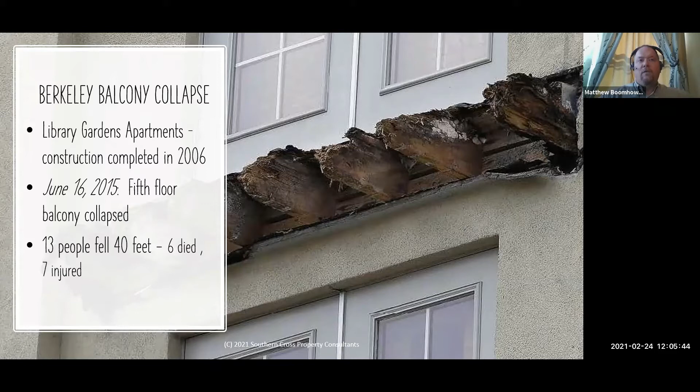And that includes a bunch of changes that were designed to fix some of the problems that were identified with this construction. But the state also said, look, we have a ton of existing housing stock out there that may have these problems, and we need to come up with a way to fix that. And so the state passed a series of laws. SB 326 and SB 721 both do different things.

And I'm going to put these up side by side because I know some of the people here deal with homeowners associations and condominium properties, and other people deal with multifamily rental, so apartments. And these laws do different things for those two housing types. So SB 326 was passed in 2019. And even though we popularly refer to these by the Senate bills, these specifically got codified into state law.

So SB 326 modified Civil Code Section 5551 and the subsequent sections of the Civil Code. When SB 721 was passed a year earlier in 2018, it added a section to the Civil Code, 17973. So if you really want to see specifically what the law says, those are the spots you can go and look. So what needs to be inspected under these laws? Well, it's actually very similar with both of them.

So first off, everybody refers to these as the balcony bills, but that's a real misnomer because while balconies are certainly part of this and they were the triggering event, it actually applies to what the code now refers to as exterior elevated elements, or EEEs. And the way that the law defines EEEs is by saying these are anything that is a wood structure in whole or in part.

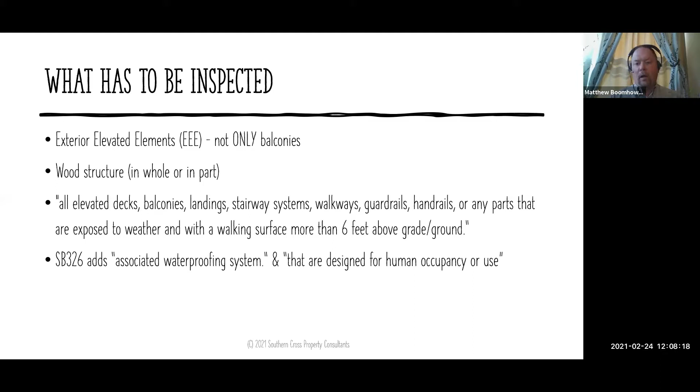So if a building has a steel structure or it's a concrete building like a high rise, those aren't wood elements. You don't have to inspect those. This is really aimed at buildings where some portion of these exterior elevated elements are made out of wood.

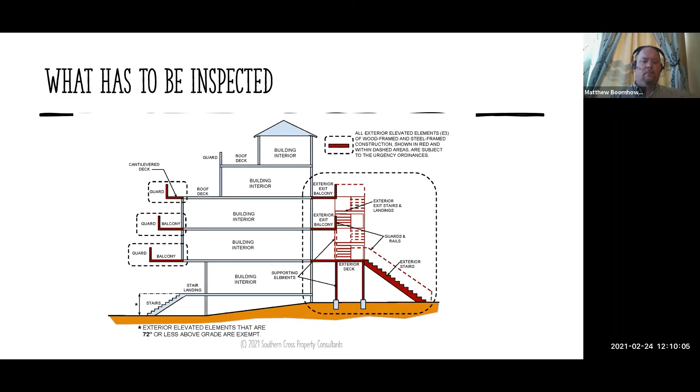So who has to comply with these 2 laws? SB 326, as we've said, applies to common interest developments. Those are commonly referred to as homeowners associations. There have to be 3 or more units. So if it's a homeowners association and it's a duplex, no, you're not in this. The minute you have 3 units or more, you get captured in this law. There are no provisions in here that change the requirements based on the size of the association, or when we get to 721, the size of the apartment complex.

There is an exception under SB 326 for single family homes or PUDs, planned unit developments. So if you have a homeowners association that's all single family homes, this doesn't apply to you. And if you have PUDs, more of a townhome setup, but a situation where you actually own the dirt as well as the building above it, then this doesn't apply to you. And that's something that your attorney can look at your documents and tell you for sure how you've been structured and if you get captured in this or not.

And then the more important thing is you have to actually have EEEs. I got a request from somebody the other day for a proposal, and when I started looking at the property pictures and pulling it up on Google Earth before I even drove out to the property, I realized they didn't have anything that made them fall into this. So with 721, same thing, multifamily residential, 3 or more units, has to have EEEs.

Who can perform the inspections? Slightly different between the 2 laws. For SB 326, it has to be either a licensed architect or a licensed structural engineer. And the reason for that is because SB 326 requires that licensed professional to actually affix their stamp to the report.

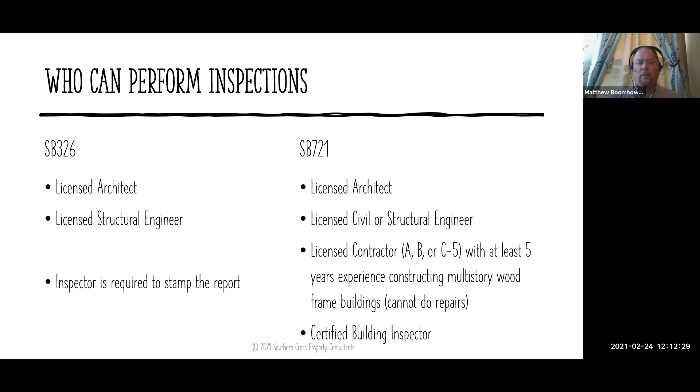How many EEEs require inspection? Again, very different between these two laws. And I know Brian Hill is going to go into this in his presentation, but for SB 326, you have to have a random statistically significant sample. The law specifically states 95% confidence by the inspector in their recommendations with a plus or minus 5% margin of error. I'm not a math guy, so I actually paid a statistician to put together a formula for us to use for this. I know many people doing these inspections have done the same thing. But as a general rule of thumb, if it's less than 25 of these elements, you're going to end up inspecting everything, and then it kind of just goes down from there.

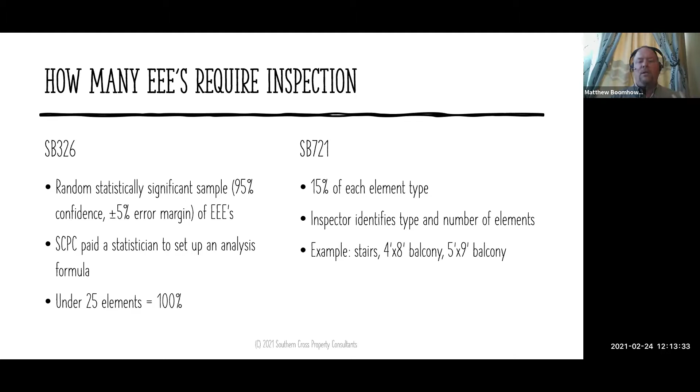With SB 721, it's different. It's 15% of each individual element. So the inspector is going to tell you how many different element types you have, and then how many of those need to be inspected. So for example, if you have exterior stairs, 15% of your exterior stairs need to be inspected. If you have different sized balconies, those are all different sized elements. And so it's going to matter how they're going to be set up and inspected.

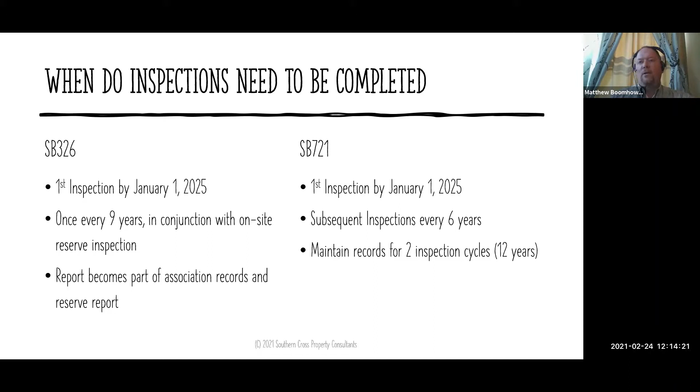Thank you. So then when do the inspections need to be completed? Well, both of these require the first inspection to be done by January 1st of 2025. For SB 326, you then go into a 9-year cycle, and this matches up with the reserve inspections that are already required under law. And it's important to note that these inspections become part of the association records as well as part of your reserve report, which means that they become a disclosable item for the association. With SB 721, there's inspection cycles every 6 years, and you have to maintain those records for 2 inspection cycles, so for 12 years.

And then what happens if you don't comply? I get this question all the time. So in both cases, you take on a liability risk. If someone gets hurt, God forbid, on the property, and you haven't done these inspections, then you lose the protection of being able to say, well, gosh, we didn't know about this, because you should have. Both of these actually also can be enforced by the local jurisdiction through code enforcement complaints. And so all it's going to take is a disgruntled homeowner or a disgruntled tenant calling the local jurisdiction and saying, hey, they haven't done these inspections. And now you're going to be dealing with this municipal jurisdiction and any fines or penalties that they're going to impose.

And then with SB 326, you've also got the challenge of being in violation of the Davis-Stirling Act, which is the portion of civil code related to how HOAs have to operate. And that opens up the homeowners association to a bunch of liability. So that's the broad overview. We're going to hand it off now to Brian, and he's going to talk about how the inspections will actually take place. So give me 1 second to stop sharing.

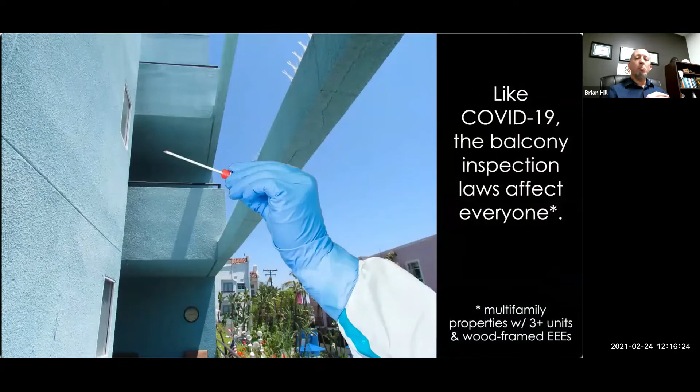Hi there, my name is Brian Hill, and I'm going to be taking you through the SB 721, SB 326 inspection process. We were trying to think of a good analogy to help people who maybe haven't done thousands of balcony inspections over the past 20 plus years. You know, what can you expect from this process? And somebody in our office suggested, you know, this is actually a lot like COVID when you think about it. With COVID, if you're in the multifamily residential housing space in California, these balcony inspections, it's part of the new normal. And as Matthew was saying, it's not just a one-time thing. This is a cyclical thing that we're going to be doing every 6 to 9 years.

And so if you're responsible for a portfolio of properties, for example, this probably becomes a continuous process that you're engaged in. Also, like COVID, what you have to be really careful about is just because there's no symptoms of a potential failure doesn't mean that you don't have a real issue.

Let me explain. When Xpera Group was asked to come out and investigate the actual balcony that did fail in Berkeley, after it had been removed to a secure location, the thing that probably disturbed us the most is that when you looked at the outside of the balcony that had been removed, it was built like a lot of other balconies in California. We like our wood framing concealed by stucco or wood siding sometimes. And so the outside of the balcony, which was covered in stucco, looked fairly pristine. There was nothing to suggest that it was on the verge of failure.

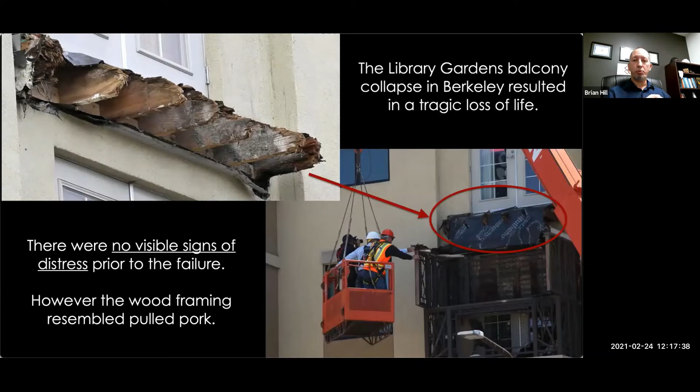And yet the inside, the wood framing, the load-bearing components, they were like pulled pork. Had the owners of the property conducted an inspection inside of that deck assembly, they might have seen the issues that were there and could have prevented the catastrophe that occurred, not to mention the criminal charges and a 9-figure payout.

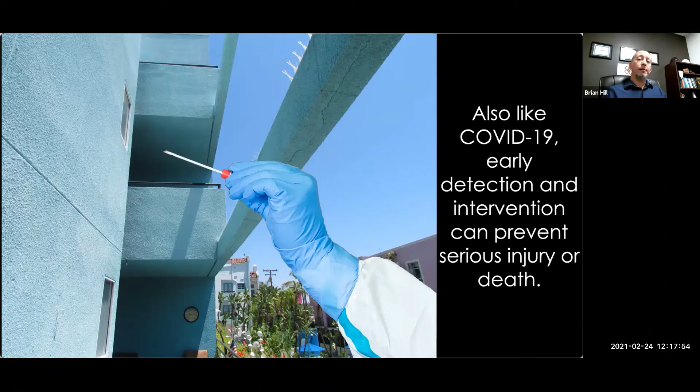But unlike COVID, masks, hand washing, and social distancing aren't going to get us to compliance with SB 721 and SB 326. For that, we have to visually inspect those sometimes concealed wood-framed load-bearing components, and we want to do it through the least invasive, least intrusive means necessary, because we want to save on money.

The first option is always going to be, regardless of whether it's SB 721 or 326, you have to conduct a thorough visual inspection. And you're looking at, again, it's not just the decks or the balconies, it's also your exterior elevated walkways, it's landings that have wood framing and extend past the building exterior wall. We're going to look at that element, we're going to look at the various surfaces, but we're also looking at how it integrates with the adjacent building materials and building components.

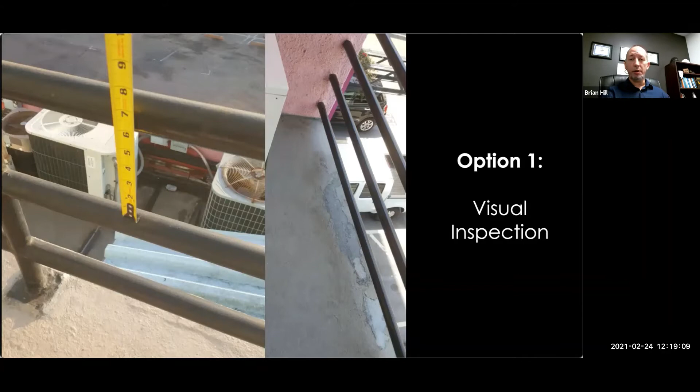We're looking at the guardrails and how they're attached and configured and if they're safe and if the attachment points are proper. So we're looking at all that information. But again, if the wood framing that comprises the load-bearing components is concealed by stucco, visual inspection alone is not enough. Now in SB 326, it mentions infrared thermography.

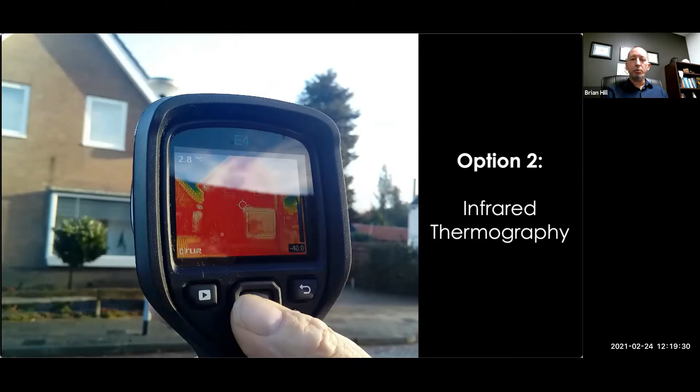And this is a very useful tool for diagnostics in building science. I'm not sure though if it's going to get you to compliance with SB 326 or 721 if you have concealed wood framing. The way thermography works, it doesn't actually let you see what's behind the stucco. It's giving you a different kind of representation, but it's not the same thing. So if we do have concealed structural framing behind the stucco, we have to look beyond the surface somehow.

So one of the options that we like to recommend is a borescope. And in this scenario, what we're doing is we're drilling a series of holes in the underside of the elevated walkways or balconies or whatever. And we're drilling in between the load-bearing components and inserting this fiber optic camera, which allows us to then visually inspect the wood framing and the sheathing.

Now, it's a great tool and it's a cost-effective means for conducting some of the inspection, but if we find staining or discoloration, what we don't know from the borescope alone is whether or not we're looking at a situation that is an active leak that needs to be addressed. Or are we looking at some historic condition that has long since been repaired and doesn't present concern?

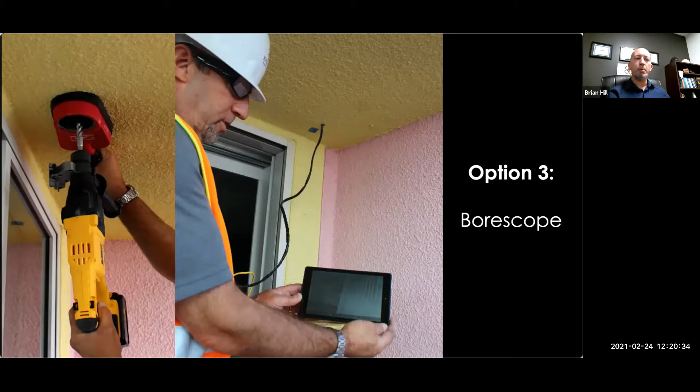We're also not able to determine what the current structural integrity of those wood components is just by visually looking at them. So if we find problems, chances are we're probably going to have to go a little bit farther. And that's where destructive testing comes in. Destructive testing is really the only conclusive way to put your eyes on concealed framing components when they're concealed by the stucco or wood siding, cladding, or other materials.

The problem though is that destructive testing is really costly. You're going to hate it. Your residents are really going to hate it. It's no fun and it's hard to see where the return on investment comes from. So the goal with destructive testing is we want to limit it as much as possible and be very strategic about it.

One of the options that is our favorite option, we try to recommend this as much as possible, is the removable or operable soffit vent. And this is kind of like a hybrid approach where you're actually cutting a slot in the underside of the stucco soffit and inserting this vent accessory.

Now, these vents are really cool. There's a reason that California code requires them now, and that's because if you do have water that gets into this assembly, the vent allows that moisture to dissipate instead of accumulating, which is what led to the deterioration that ultimately caused the catastrophe in Berkeley. So when in doubt, go with the vents. We really like those.

Now let's get into sampling and statistics. This is a complicated subject, and I'm going to do my best to talk about it. Let's talk about what first is sampling. We decided to ask an expert. It wasn't this guy. We reached out to Dr. Robert Riffenburgh, and Dr. Riffenburgh, besides being a member of SCRHA and an apartment owner himself, is a statistician, and he deals especially with the statistics of medicine.

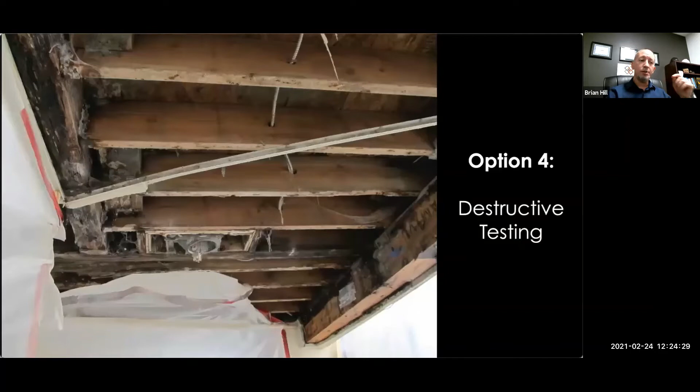So there's a lot to take away here and a lot that we don't have time to cover. SB 721 and SB 326 are complicated. So really, as Matthew suggested, seek out legal counsel, seek out experts to help guide you in your path to compliance. Removable soffit vents, please consider them. They're a very good investment. Early detection and intervention are really the keys, though, to managing the risks of exterior elevated elements. Whether it's finding conditions before they become catastrophic or before they cause further damage. The sooner you get in there, the better.

So what does the path to compliance look like? Step 1, you need to figure out what's required for your specific property or properties. You need to evaluate your own tolerance for risk, and based on that, design the inspection protocol that's going to help you achieve the goal, balancing that with the need to maintain cash flow or your reserves. And ultimately, plan the inspections out in terms of the time frame.

Waiting until 2024 is a really bad idea. I'll just let you know now. The prices are going up in 2024. Everybody's going to be scrambling to get their inspections done by January 1st, 2025. So if you have repairs that you need to make as well, you want to leave yourself plenty of time to plan for that. And with that, I think it's probably a good time to switch it over to Glenn to talk about the repairs.

Glenn, I'll go ahead and let you introduce yourself. Your microphone is still on mute, remember. There we go. Can you hear me now?

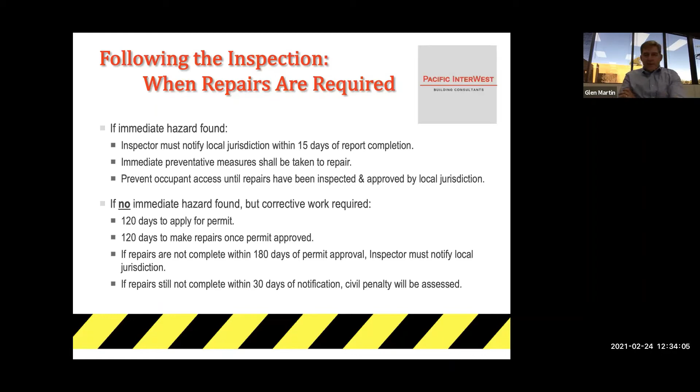Let me move the slide here. So some of the things that we find do require structural engineers, obviously. The beams and posts may have rotted out pretty badly. So you have to put together a plan that includes the structural, because so many of these structural elements are failing, whether it's joists or beams or posts. And you have to put together a plan. Generally, those elements are not dissimilar from those things you would do for any other permit application you would have. It's a site plan. You need to lay out the building type and element, the elevations.

We do enlarged plans. Typically, you should do enlarged plans and details, and the structural engineer would be responsible for structural notes and details. You want to give as much information on there as possible for a couple of reasons. One, I think when you get into the plan check process, you don't want to go through several iterations of plan check. It'll only drag this out. Do a little bit better job, whether you hire an architect or you have your contractor do a turnkey where he brings his own plans in. Make sure that those plans are detailed fairly well so that you can get through the process.

And the other side of it is the more detail you put in, the more specification that you add, the better bids you will get. I think it's important to understand that you're in a competitive environment right now, trying to attract good contractors and trying to get the best pricing. Most of you in the industry may know that, 6 months ago, lumber was running at about $345 or $350 per 1,000 board feet. It's up to over $1,000 now, 3 times as much in about a 6-month, 7-month period. So it's important to tighten up these bids the best you can, and the best way to do that is to be very clear about what you want repaired and how you want it repaired. So the better the drawings you have, the better the narrative on the scope, the more successful you'll be in getting the kind of pricing that you want.

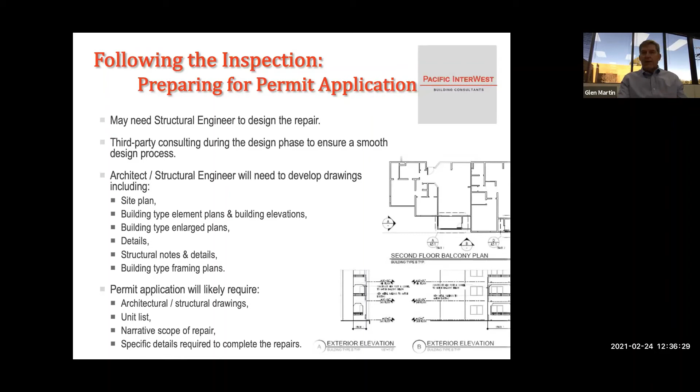Glen, this is your 2-minute notice.

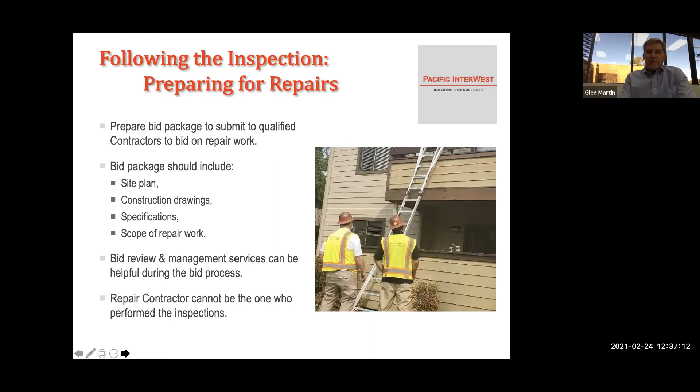Very good, thank you. So as you know, I've kind of taken you through the bid package that would include these things, and you want to make sure that the repair contractors are qualified to do this work, and hopefully there's someone that you have. It's a firm that you have some experience with. I think that's very helpful in making sure that you can control change orders as you open up buildings. Like any other remodel job, things are found, and you have to have a very good relationship with your contractor and a very clear understanding of how you'll handle those things. Obviously, when you're putting in manufactured products and you've got coating systems and so forth, you want to make sure you're following those manufacturer specifications. Very important.

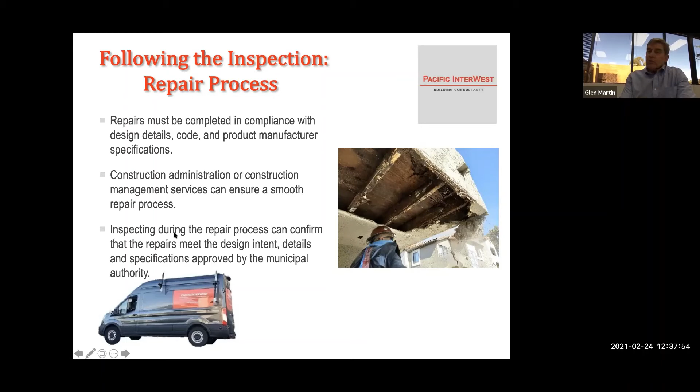We've kind of talked about the key things here. I think managing the process is important. You need to be actively engaged or have someone that's paying very close attention to what's going on, again, to minimize change orders, but also to ensure that the work is done properly. You should try to get that work inspected by a third party as you would in new construction to ensure that things are done properly. We've talked about already every 6 years under 721, and 326 is a 9-year cycle. You need to keep these reports on file for a couple of cycles. So for quite a while, you need to make sure that's clear to your inspectors and to your team as they collect that data. The more data you collect, the easier it'll be on the next round of inspections.

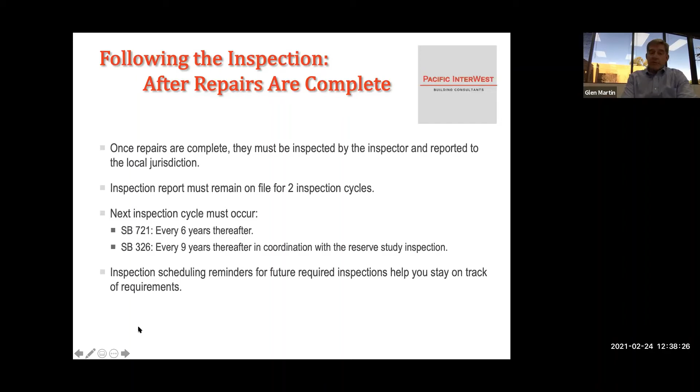And again, you've heard this before, inspect now. Prices will be going up because why? Contractors are going to get busier and busier. Competition, even on the inspection side. The schedules are getting a little bit tougher right now to get the inspectors out. And it's certainly going to be much tougher with time. So, do your homework, prepare. Before you go into this, try to spend time with your inspection company to look at that portfolio and understand what you might have to do for budget purposes on your portfolio, so you can time those inspections by community so they fit in your cash flow.

And I'd like to end with, certainly, by all means, vent. I think as the other presenters have mentioned, venting is the most important thing you can do. So when you do the inspection, we strongly recommend you leave a removable vent in.

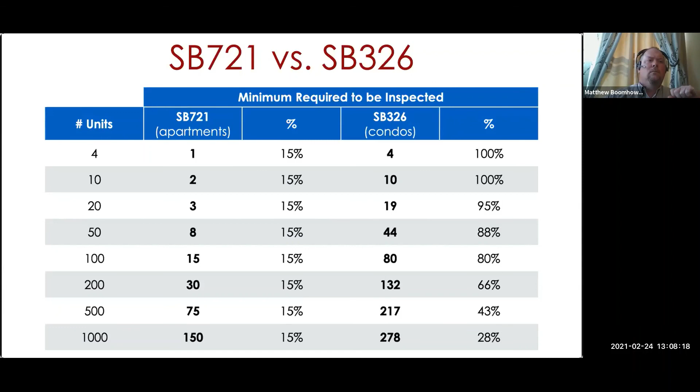No, absolutely, Matthew. And the thing in our association that we talk about is we're housing providers, all of us in some form or fashion. We provide housing for our family, for our friends, for our neighbors, for our community. And when you look at it from that perspective, that's who you're protecting when you follow the rules and make sure everything's being done right. So just keep that in mind.

Last question, does a third-party vendor have to install the vents, or can this be done by the owner's on-site maintenance? Go, Glen. Yeah, there would be no prohibition to doing it yourself, and it's not a bad idea if you can get in and do that work. I would check with the local jurisdiction to make sure you don't need a building permit to make that change, because we always do that as part of our inspection. If we're going to put in ventilation, we'll check with the jurisdiction to ensure that we don't need to pull a permit. But you should be able to do that. If the person is qualified, it wouldn't be a problem. It's a fairly minor modification.

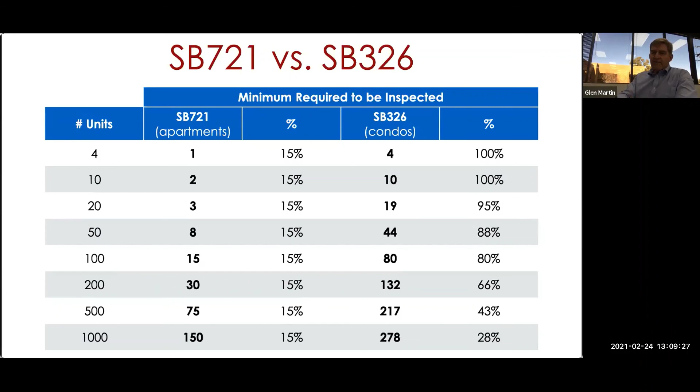The only thing I did want to add is that there is a requirement under SB 721 that the inspector cannot be the same entity that's the contractor that's making repairs. So that would be the only restriction in terms of making repairs.

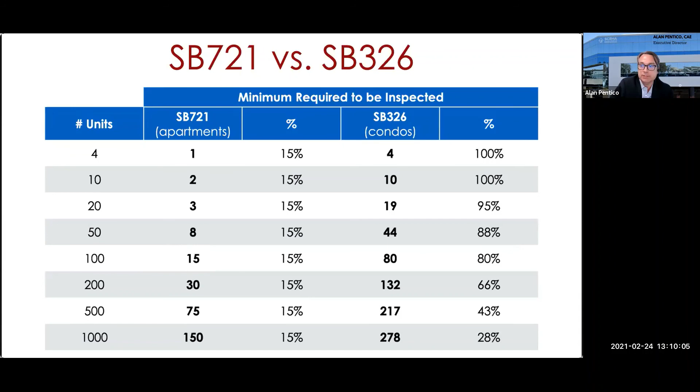Excellent. Well, that concludes our questions. I just want to thank the three of you, Matthew, Glenn, and Brian, for participating in this BIA San Diego sponsored discussion on California balcony and deck inspections. It's been a great, very informative conversation. We answered 30 different questions throughout this session, and watch for the materials to be posted to the website for more details on the slideshows.